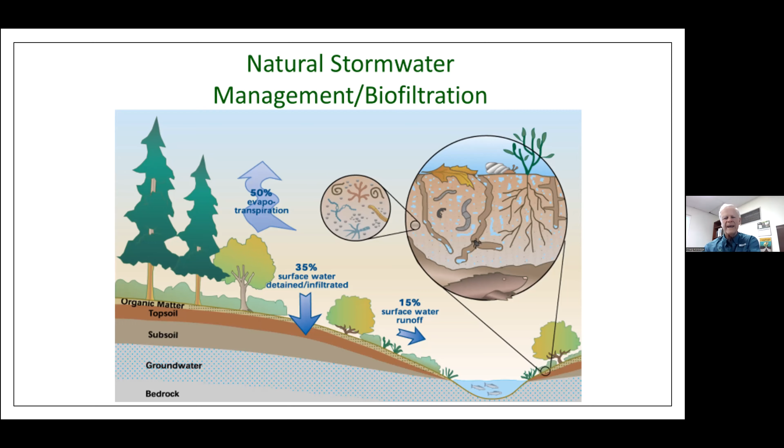If you look at this picture, it's one of the slides introduced to me by Dr. Britt Faucette, a very dear friend and the technical director for Filtrexx International. He always pointed to this slide as capturing why compost is so important and how it works in a natural system. In stormwater management, we try to mimic nature. Dr. Faucette did his PhD and is, in my opinion, the world's leading authority on the use of recycled organics as it relates to stormwater management. He's done tremendous research and outreach, and this is probably his favorite slide to show people exactly what's going on when we apply organic matter, and why it's so essential to stormwater management.

Why this is so critical: when you treat your carbon, in the form of organic feedstock, as a waste product and bury it in the earth in landfills, it produces a chemical molecule called methane. Methane is 25 times more potent, some say even higher, in holding atmospheric heat in our environment, escalating and adding insult to injury. We've already got too much carbon in the environment due to burning fossil fuels and hydrocarbons, and then we take our organic material that can be used in so many other, more beneficial ways, and we bury it.

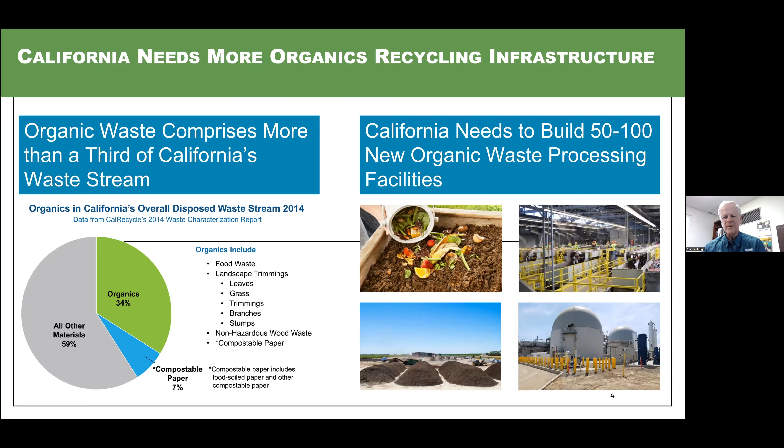Well, those days are quickly coming to an end. The demand for recovered organic waste products is now driving infrastructure investments. So you've got the collection, the recycling and recovery process, and the procurement of what is produced through recycling and recovery. Then you have the end use, which is what we'll be talking about more today.

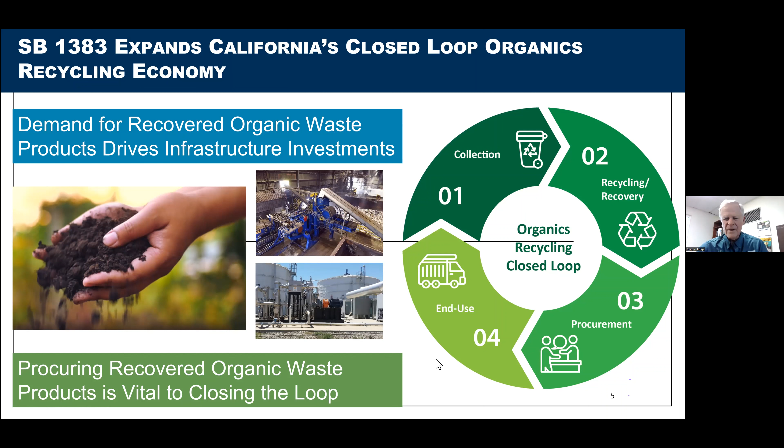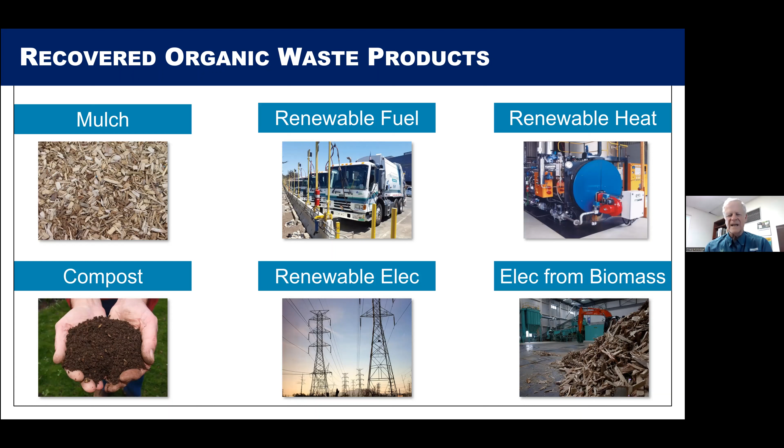We will not be covering those today. Those are other components of Senate Bill 1383 you'll be hearing more about, but today we're focusing just on mulch and compost. The one thing you have to realize about renewable fuels: even if we processed all of the organic waste we have right now, it would represent a very small percentage of the fuel necessary to drive our economy. So even though it's an option, largely Senate Bill 1383 is going to be about mulch and compost and how we manage it.

Now, mulch and compost have to be eligible to go toward the mandated compliance requirements for Senate Bill 1383. The mulch must meet or exceed the physical contamination, maximum metal concentrations, and pathogen density standards set by the state and by local jurisdictions.

It has to be produced at one or more of the following permitted facilities: a compostable material handling operation, like San Pasqual Valley Soils where I work today, or a facility other than a chipping and grinding operation. The reason chipping and grinding operations do not fall under eligible mulch is because they typically are not part of the waste stream that goes to landfill and produces methane.

That material typically is left on site during the course of a land clearing operation. So it really wouldn't help us in reducing the amount of organics going to landfill if we were to focus on that. So that's taken out of the equation.

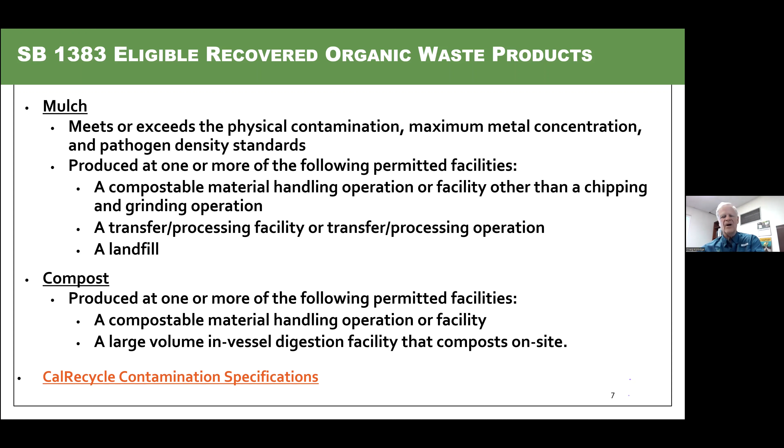It also applies that mulch can come from a transfer processing facility or a landfill. Then the compost also has to be produced at one or more permitted facilities: a compostable materials handling operation or facility, like San Pasqual Valley Soils, or a large volume in-vessel digestion facility that composts on site. So those are your options.

Let's look a little bit more closely at mulch, because mulch can be used as an extremely effective filtering media in a sock or even in a berm to filter stormwater.

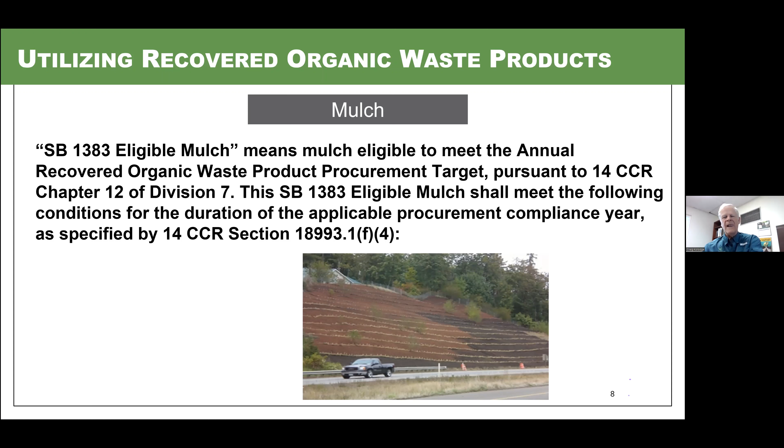Because of that, the jurisdictions have enforceable ordinances or similarly enforceable mechanisms that require the mulch to be procured by the jurisdiction to comply with these articles. That includes testing mulch for physical contamination, maximum metal concentrations, and pathogens.

So you have to be a little careful with non-composted material that has not gone through a pathogen reduction process, which all permitted compost facilities are mandated to do. Meaning that non-composted mulch, wood chips, even if coming from a permitted facility, must go through these standards and meet the local jurisdictions' enforceable ordinances.

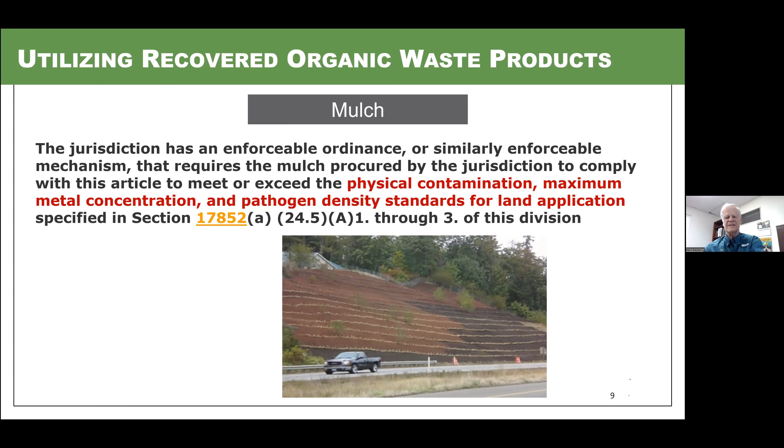And I will tell you for a fact that most permitted facilities don't go through these testing requirements. So it's going to be very hard to find a composting facility or anybody that actually has gone through this testing. So that leads us to compost.

Compost means the products resulting from the controlled biological decomposition of organic solid waste that are source separated from the municipal solid waste stream, or which are separated at a centralized facility.

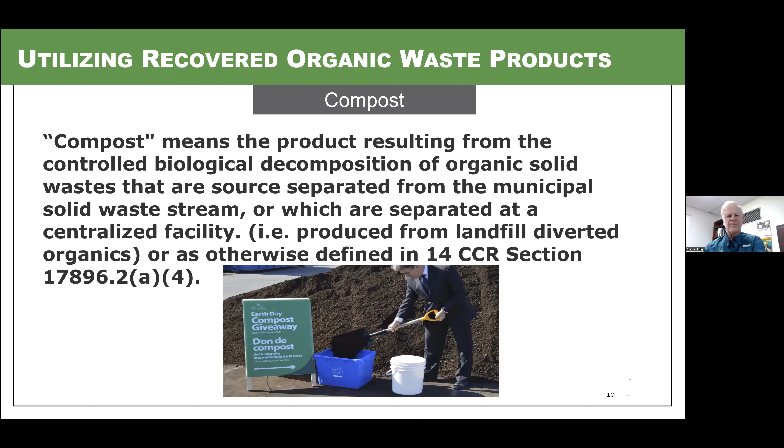In the process of biologically decomposing this material, we heat the material up, thereby making it safe to use and eliminating pathogens like E. coli, fecal bacteria, and weed seeds. Therefore, compost is the organic material of choice when it comes to the two options.

Now, if you look at the procurement of recovered organic waste products, it's based on the jurisdiction's population. So, for example, the San Diego region's population is roughly 3,351,000 residents, and they apply a per capita factor of 0.08 tons per individual.

So if you multiply 0.08 times that population, the San Diego region has a procurement requirement. The jurisdiction target is to utilize and process 268,143 tons of raw organic waste.

So the procurement target is based on the total raw organic waste that is then processed either as a mulch, non-composted, or as composted going through this biological decomposition.

So now look at that conversion factor for products, and then go down to that green arrow where it says mulch, 268,143 tons. What they're saying is the conversion factor, because the mulch is not composted, is 100%. So it's one ton for every ton of raw organic waste, meaning it's not broken down.

When you take this raw material and you compost it, you actually lose almost 40% of it through the decomposition process. Therefore, you can actually use less compost to meet your raw tonnage procurement requirement than you can with mulch. Meaning, if you use compost both as a mulch and as a soil amendment, and we're going to show you a number of different uses for it, you actually need less of that material to meet your compliance requirements of tons of raw organic waste that are diverted.

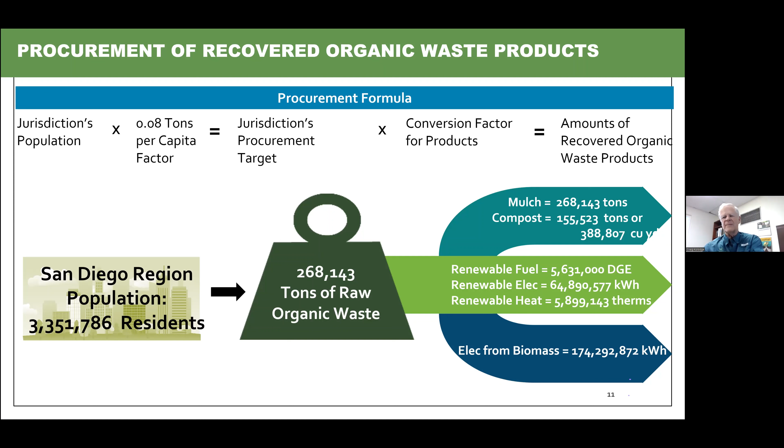So that results in the amounts of recovered organic waste products. And compost is your best bet for the biggest bang for the buck, okay?

Now you can utilize these recovered organic waste products, both compost and mulch, in a number of different ways. Here I just list a few. We're going to talk about a few more here as we get into the discussion.

You got city parks, landscape center divides, roadway and construction projects. You have erosion and sediment control of slopes and areas where soil has been disturbed. You have green infrastructure, which is the mimicking of nature to vegetate something similar to what that landscape looked like before you denuded it of vegetation.

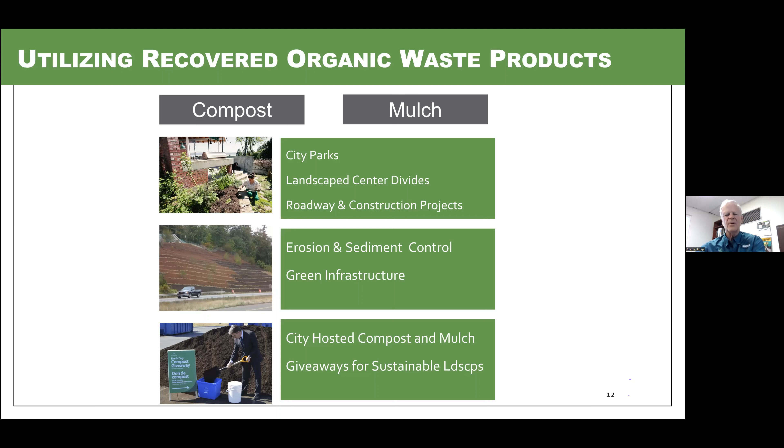And we also have city-hosted compost and mulch giveaways and other means of using this material. Now, an example of this is the San Diego Sustainable Landscape Guide that—oops, sorry, let me go back.

The procurement options include direct procurement, which is compost for city managed and commercial landscaping. The jurisdiction can procure recovered organic waste products directly for use or giveaway. They can procure it for erosion and sediment control and green infrastructure, and also through their relationships with waste haulers, landscape services, and transportation services. All of these are avenues for people to start to gain control and use of recycled organics beneficially, to minimize global warming as well as to manage stormwater and air quality.

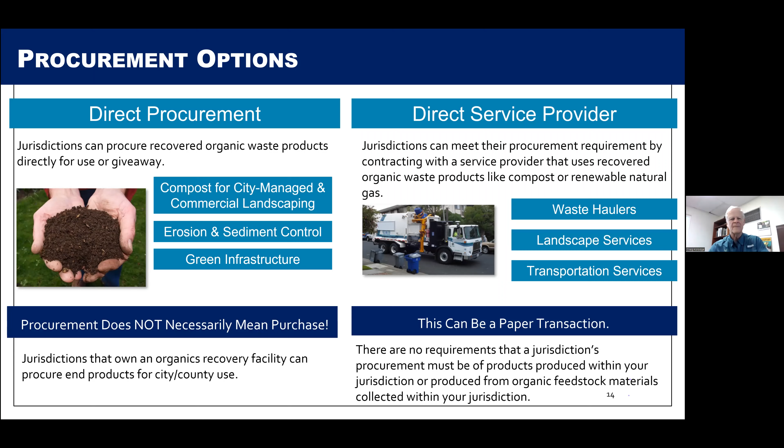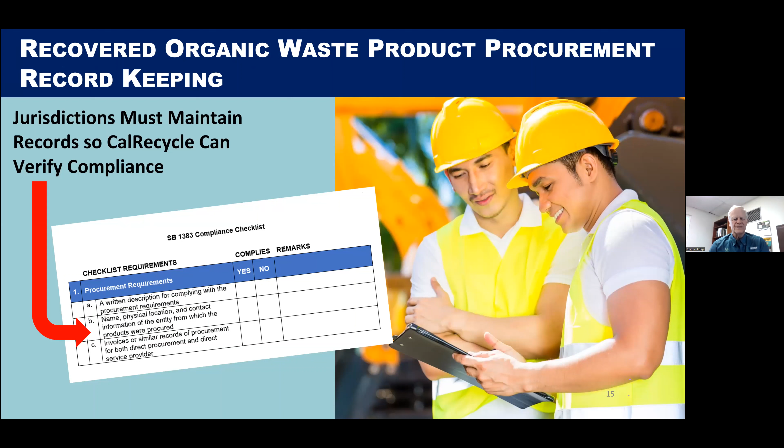This can be a paper transaction, and there's no requirement for a jurisdiction to utilize their own compost that they produced. They can take compost from other jurisdictions to meet procurement requirements, as well as sell or make accessible compost from their jurisdiction to other jurisdictions. So there's a lot of flexibility on how compost gets moved around and tracked. One of the main requirements of the new bill is to actually keep records of what you're procuring and how you're maintaining and using these records, verified through CalRecycle to confirm your compliance efforts.

Water quality, erosion control, and the landscaping sectors play a major role in this. The current and potential compost and mulch sales, on the left, are relatively small at 621,000 cubic yards, not anywhere near what we're going to need. The total potential sales of 1,521,000 cubic yards is where we need to get to, where we need to go. That's why we're talking about this, and why all these cities and jurisdictions in the state are going to be wrestling with this requirement.

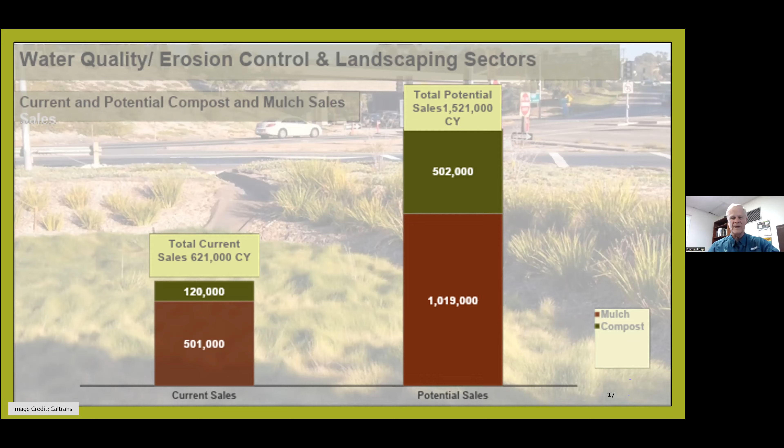So let's get now to compost and compost-based management practices that will help us meet these goals. First of all, these uses of compost align with climate action plans and comply with state requirements. They improve stormwater quality and reduce erosion. We're going to talk a little bit about how they do that.

They significantly reduce runoff volume because compost, half-inch minus fine compost, will absorb a tremendous amount of water, about 4 gallons per 1 cubic foot of fine compost. That's how much it'll hold. So if you can absorb water, do you have a runoff volume if you absorb all that water with compost mulch? You don't. Once you control the runoff volume, you essentially control the erosion and the sediment that moves with it. Nutrients and pollutants are decomposed by naturally occurring microorganisms. Our ability not only to capture stormwater, but to basically clean it up and filter out pollutants is so critical to the quality of our environment.

Then you get into the carbon benefits, which is really at the crux of Senate Bill 1383. The use of compost BMPs encourages healthy soils, which ultimately results in sequestering or storing this carbon in the soils themselves. So we can take it out of the environment. It can be taken up by plants and by all the organics that we use, and we can sequester and store it, moving it into the soil where it will be safe and not continually impacting the atmospheric environment that we're trying to manage here.

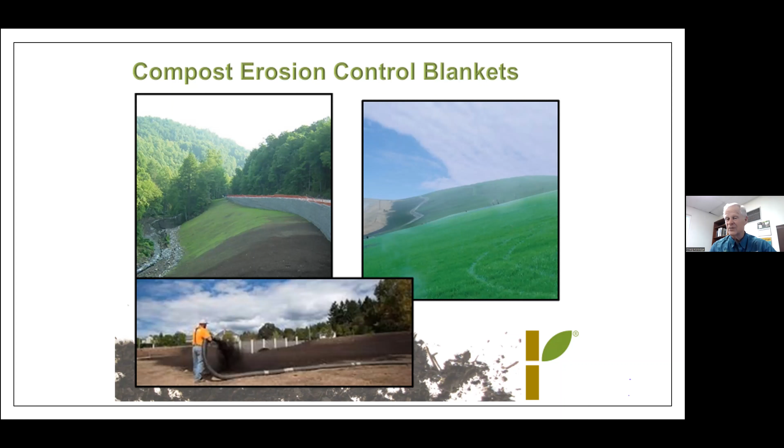So compost erosion control blankets—that's one people hear about and don't know what we're talking about. They're thinking of a blanket, but what we mean is that growing media being used as a mulch. Remember, compost can be used not only as a soil amendment to grow and support plant vegetation, but also as a soil erosion control blanket. It's usually blown on large, ideally through a blower truck, in a layer of 1 to 2 inches maximum. You can add seed to it, ideally native seeds, and if you can vegetate it either through natural rainfall or irrigation, there is absolutely no competition for that as the very best erosion control you can have, period—a vegetated layer of plant material, ideally grass, because there's a very fibrous root system holding that soil in place.

Here's a picture of grass growing in a layer of compost, a compost blanket. You can see in the bottom photo they're blowing that on a slope, and oftentimes it has seeds in it. Once the water hits it, those seeds germinate and they lock that blanket in place and hold that soil beautifully, where you get virtually very little to no erosion.

Erosion is the detachment of a soil particle from the soil surface, simply put. It differs from sediment in that sediment is what has already been detached. So when you have sediment, you are already detached. Ideally, we want erosion control; if we don't have 100% erosion control, then we want to capture that sediment. And compost can do both for you.

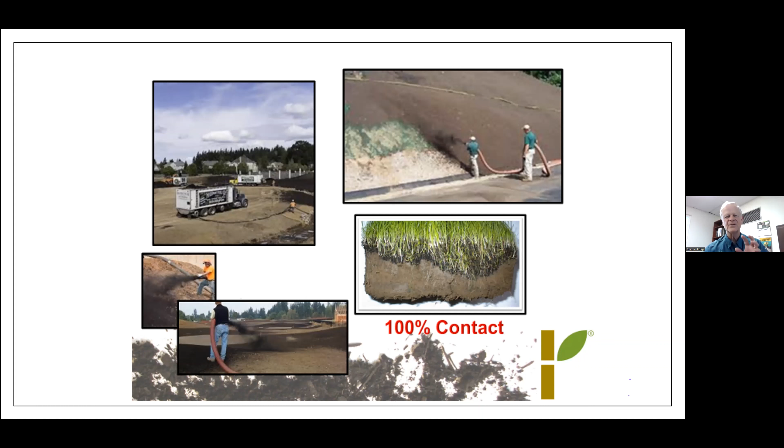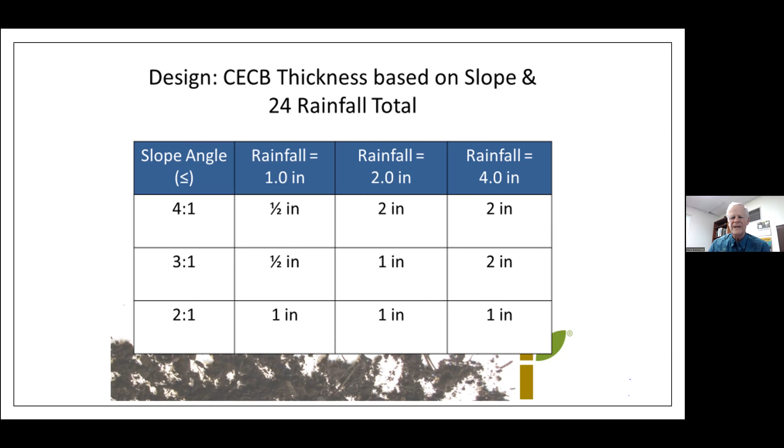And we're now going to look at some case studies on compost and mulch utilization. In this case, I'm referring to mulch as a compost mulch, not as a woody mulch—okay, as a woody non-composted mulch.

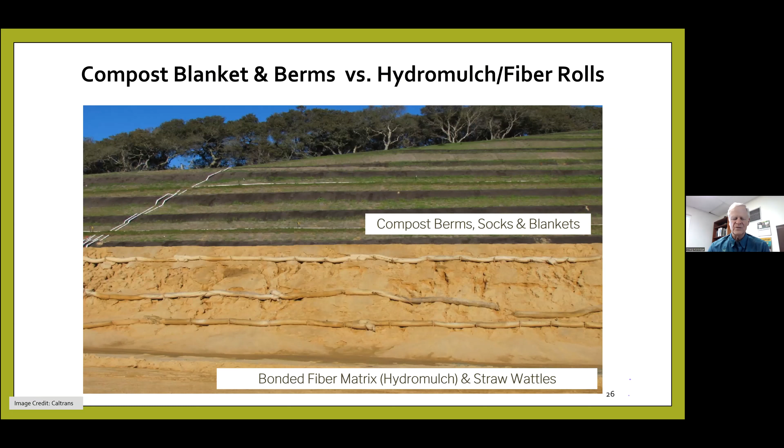Compost, when used as berms to filter stormwater, is extremely effective. It can also, the finer material, the blankets can be vegetated and be used for creating filter cells, vegetated bioswales, all of them very effective at not only removing sediment, but pollutants and vegetating and preventing erosion.

So in the Caltrans study, what they discovered was compost retained a large volume of water without the movement of that blanket. It prevented and reduced the rill erosion. You saw the photograph. It reduced runoff volume. Remember I said if you can absorb the volume of water and hold it in that organic material, you don't have a runoff problem. And it promoted the establishment of vegetation, which really locked in that soil.

Compost improves the downstream water quality by retaining and adsorbing pollutants. The surface of this organic carbon allows pollutants to attach to it, and then the microorganisms in nature will actually degrade and in many cases even decompose the pollutants themselves, like hydrocarbons, oils, diesel, gasoline, things like that. It'll tie up heavy metals. It will consume, believe it or not.

A lot of people think compost blankets contribute to nitrogen, and they can if you don't use the right compost and you don't follow specifications. But more often than not, compost blankets and berms and socks will actually lower the amount of nitrogen, phosphorus in the runoff, as well as capture oil and grease, fuels, and pesticides and herbicides. Extremely effective at cleaning out pollutants in our stormwater runoff. And also in the same token, when used as a mulch, that will break down and improve the soil's underlying soil structure and nutrient content, reducing the need for chemical fertilizers, creating these healthy soil biology.

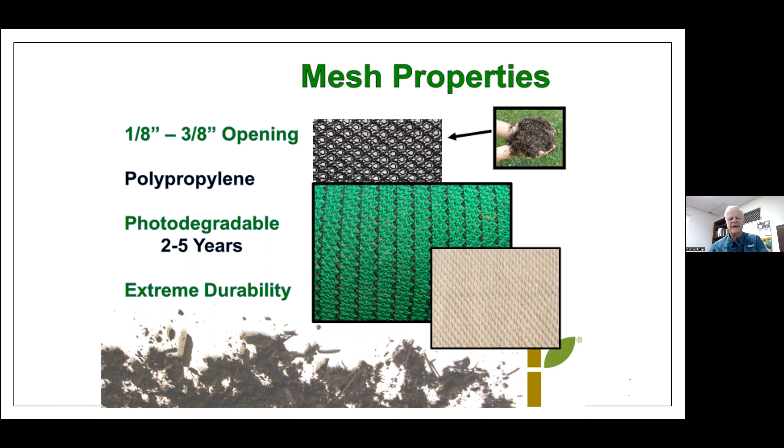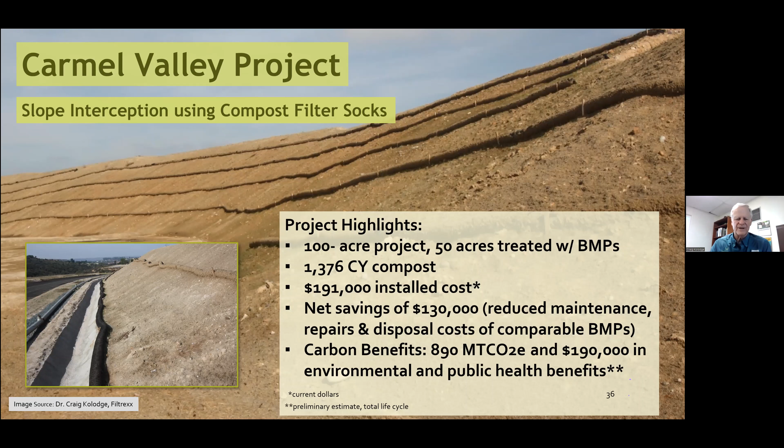The carbon benefits to this were 890 metric tons of CO2 equivalent and $190,000 in environmental public health benefits. So there are some really good financial reasons why you want to be looking at these options. It comes in a biodegradable material mesh as well, these socks do.

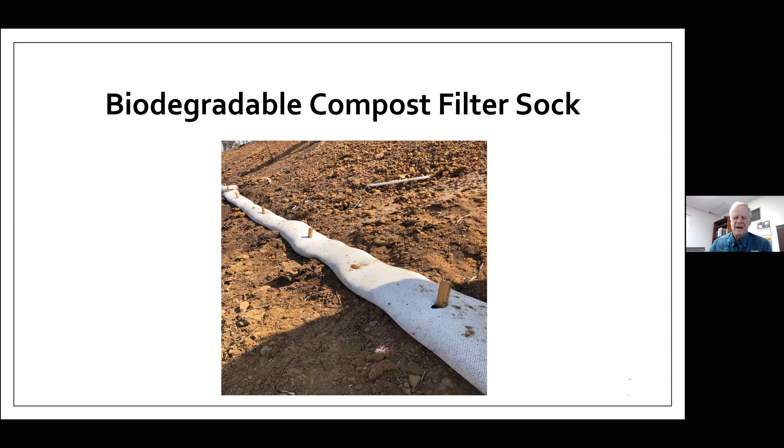Here's a project Caltrans did. In this case, they used a growing media in it, which I don't typically recommend with a biodegradable sock because the bottom will rot out very quickly with any amount of moisture. And here's what happened. You can see the sock started to rip and tear on the slopes.

But what was nice about it was they just cut the sock when they were done. As they came in and started landscaping, they just layered the compost there to support the vegetative landscape material and left the socks in place. They never removed them. So if you're going to use a biodegradable mesh, make sure you apply it to an area where you never want to pick that sock up and use it again. It's going to stay in place and become part of the landscape.

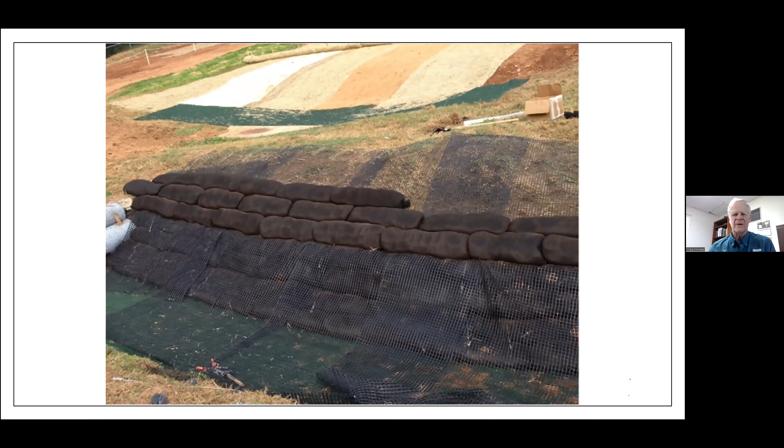So here's some examples, and I'll show you where you can get some information on this, on how you anchor these socks in using GeoGrid to wrap the socks with the growing media and putting seed in the sock. Here's an example, part of it, the lower portion being wrapped in GeoGrid with the upper portion just being stacked on top with growing media in it. And there's what it looks like after the vegetation takes hold.

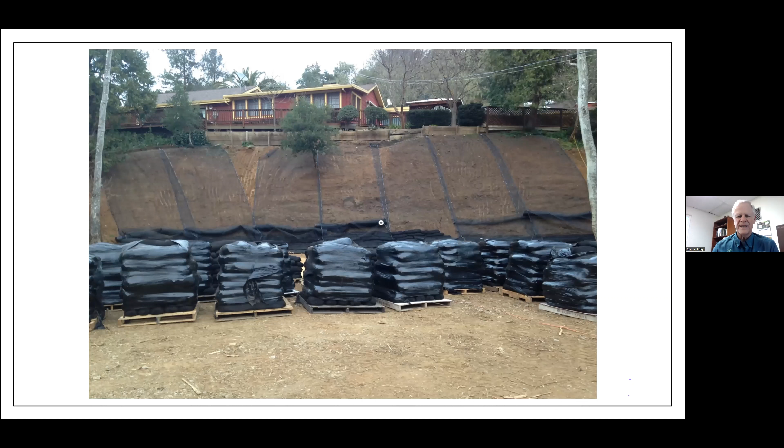Here's one high wall project that was just amazing. This was a quarry, so this is just literally rock with very little to no soil, and it's 400 feet in height. People blowing about a half inch to 1 inch layer with native seed onto this slope had to hang on halters. It was 7 acres of severe slope. They used 964 cubic yards of compost at about 1 inch depth.

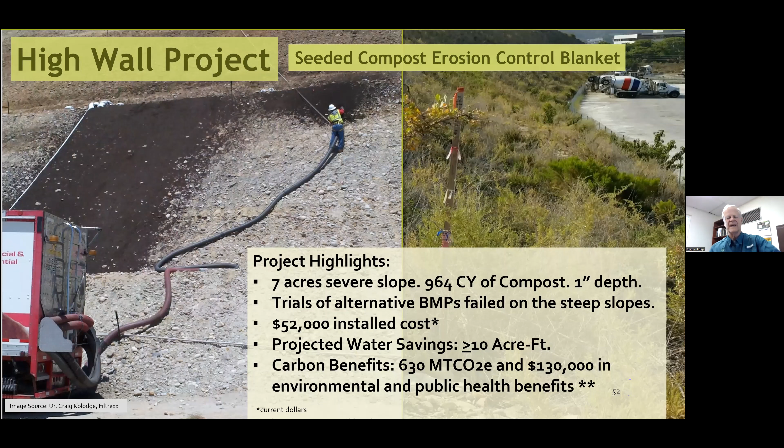We trialed alternative BMPs, but they failed on the slope. The cost of this was about $52,000 to blow it on there. Projected water savings was greater than 10 acre feet, and the carbon benefits, 630 metric tons of CO2 equivalent, were sequestered on this slope, and 130,000 in environmental benefits. You can see on the right the vegetation after it took hold in the background there.

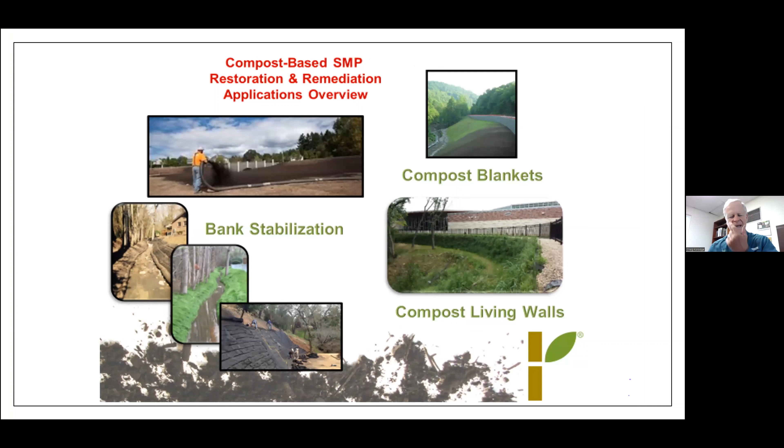So you can see restoration and remediation applications are really an untapped resource here in California and elsewhere. There's a lot more we can be doing with this material, and I just wanted to show you a few examples. You can even create living walls with it.

But the next steps, and this is a call to action to really get people to better understand how to use this, is communications and training to staff and contractors on the operational, environmental, and economic benefits of using compost, similar to what we're doing today.

And to become engaged and promote updates to address erosion control and water quality project specifications using locally produced compost and mulch. Then to quantify benefits of potential projects using a full cost analysis through use of tools and case studies to demonstrate economic and environmental value of the best management practices.

And lastly, to collaborate with local colleges and horticultural erosion control training programs like Stormwater Awareness Week to share information on these practices.

Dr. Britt Faucette and Rod Tyler and Alex all contributed to the development of this non-proprietary Sustainable Site Design Manual with 24 different applications, outlining what you need to know to be able to utilize compost to create sustainable sites.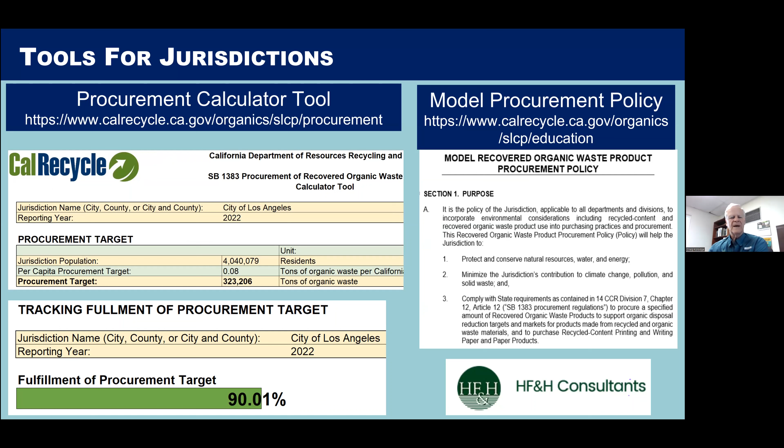And then there are tools to quantify benefits, and it's really important when we start justifying the cost of our BMPs to be able to quantify what benefits we're driving. A big one is the Comet Planner, put out by the USDA, which utilizes soil tests for measuring organic matter and calculating the amount of carbon being sequestered. There's also CARB, the California Air Resources Board, which has a benefits calculator tool on organic programs. You have the US EPA waste reduction model called WARM, and Greenscapes, also associated with the US EPA. And on CalRecycle's website, you have procurement calculator tools and model procurement policy. Just a wealth of information. So with that, I'm going to stop.

I've done a whirlwind tour of compost BMPs, and I'll open it to questions, John. All right, well, thank you, Craig, as always, quite informative. So we do have a few questions that I wanted to cover, and if you have any questions, go ahead and type them in. I think this one you were answering even as they were typing it.

Are there any alternatives to polypropylene socks because of the problem with photodegraded plastics? What is the risk with the polypropylene? I actually, while you were talking, found an article by the government suggesting that polypropylene could actually absorb a certain amount of PFAS. What have you seen as far as alternatives or maybe the negatives of using polypropylene?

Well, Filtrexx makes a biodegradable sock, the natural, that's made of a biodegradable material. Beyond that, you're really stuck with either polypropylene or polyethylene. Filtrexx makes different types of sock, different size diameters, depending on the specifications of the project. But here's the deal: the mesh itself is a component of the system, meaning what's doing the work really is what's in the sock, and you can leave that on site. You can cut the sock up and remove the polypropylene so you don't leave it in the environment, or you can remove it and leave the compost to do what compost does, which is degrade and enrich the soil. And in the case of mulch, it'll actually continue as a berm. Once you're done, you can cut the sock, remove it, and leave the berm there, and it will still function as a stormwater filtration device or application.